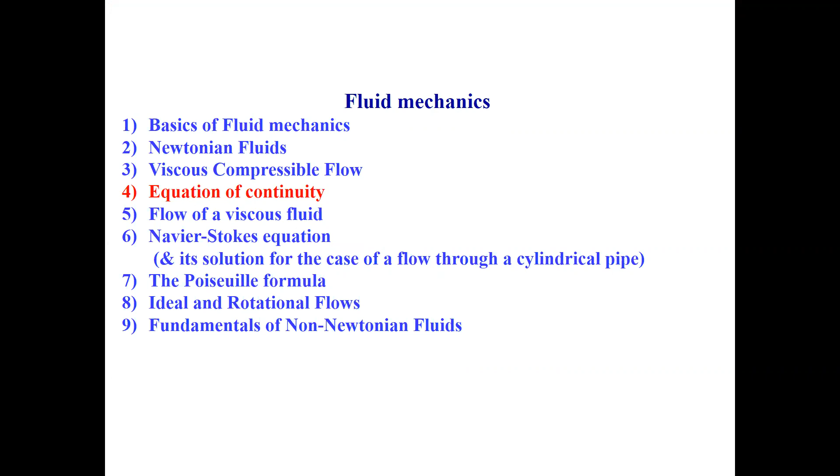Let us see the next one. Let us see that the equation of continuity is the fourth topic in your curriculum. I'll try to convince you in some manner by getting good examples, particularly from atmospheric dynamics.

You might have heard these names. The names are different mainly because a cyclone is the system generated in the atmosphere due to the rotation of the air mass. The same thing occurs as a whirlpool in huge lakes or rivers, not in the ocean.

Once they enter, it takes its own time to reach the bottom, and it will not stay there. Immediately, it comes back in an anti-clockwise motion. It will be thrown out either from left to right or right to left.

People entering the whirlpool should have the capability to hold their breath for a few minutes, sometimes a few tens of minutes. If you go with an external supply of oxygen, you can certainly enter the whirlpool and see the convections and flows that are possible.

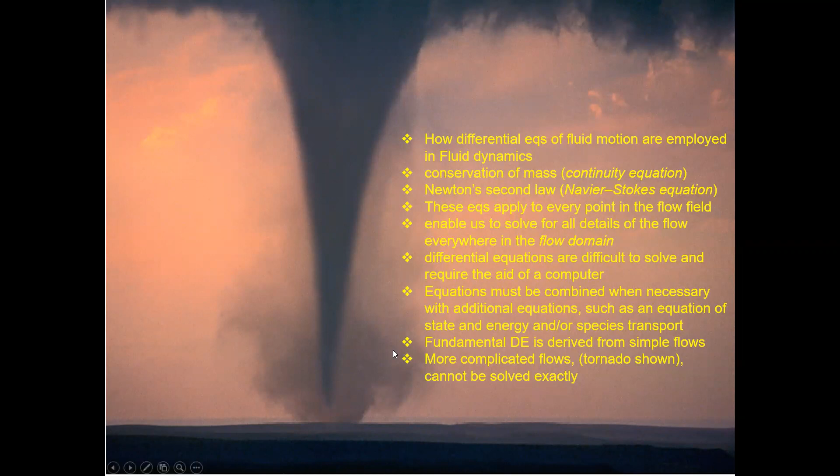More complicated flows, for example tornadoes as shown, cannot be solved exactly. For that we have to depend on the computer.

Okay, no issue. What you are seeing? Good, I hope you can see it—both top face and bottom face.

How many of you are from Bidadi? I hope some of you are from Ramnagara, and some from Ramohalli, near Bangalore University, hardly about 10 to 12 kilometers from this place. This is known as the dish antenna.

What you have as antennas in your house to get cable network or TV connectivity works differently actually. This is a huge dish of 32-meter diameter. IDSN, the Indian Deep Space Network, is a complex which comprises deep space antennas of about 32 meters.

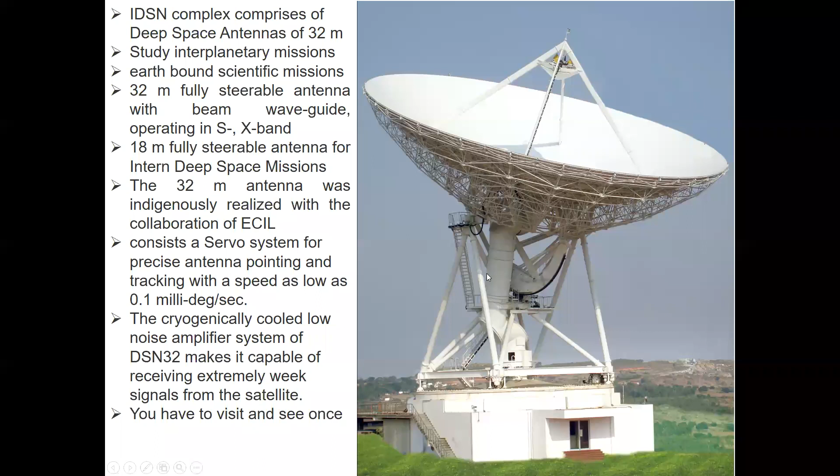You have to visit and see it once. From outside it's not a tough task—you can go see the big banyan tree near Ramohalli too, which is also available nearby. Of course, you can see it through the internet also, but if you have a chance to go there, it is better. Maybe if time permits, we will make a visit to this station once. If you are interested, let me know—you have to respond to me later.

This is another—see the same case now. How many of you are there?

How many of you are aware of swimming in water? Maybe some percentage. Maybe all of you know swimming better. Of course, I am not a good swimmer at all.

If you know swimming, you can swim along the flow of water, maybe in a river or canal, no issue, even wells, it's a tough task but still. If you want to go against the flow, you have to put more energy. Can you walk in a lake or river against the flow? It is difficult.

Can you keep any obstacle against the flow of water? It will collapse. If wind is coming from the left and hitting this entire 32-meter diameter, work out the circumference, pi times d, 2 pi r, so 32 times pi, pi means about 3, almost 100 times - 100 meters is the circumference.

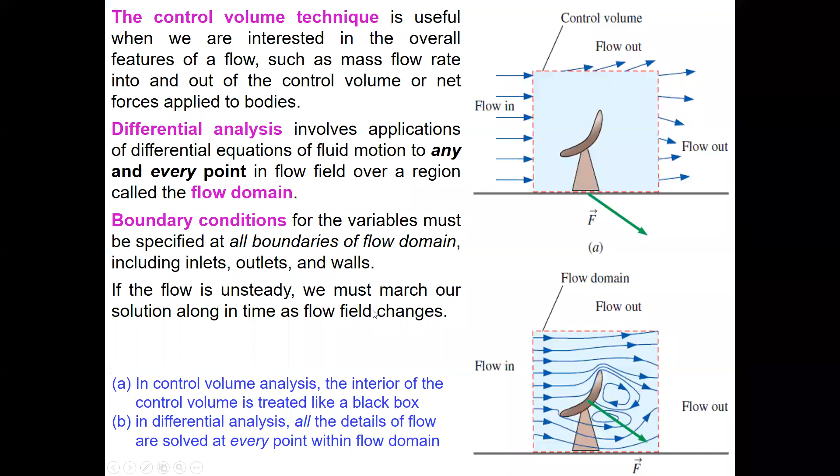In a flow, air density and temperature changes are insignificant - we are not considering them. There is a change in the density of the air, and to some extent it is allowed, a very infinitesimal change. If it changes drastically, we have to take it into account.

But it is sufficient to solve two differential equations of motion. One is the conservation of mass, and another is the linear momentum equation. The linear momentum equation can be solved by virtue of the application of Newton's second law.

For three-dimensional incompressible flow, like fluid water, there are four unknown quantities. What are those four unknown quantities? Particularly three velocity components: one along the direction u, another perpendicular to that direction v, and w is vertically upward. For example, along the rotation of the earth, east is u, north is the v component, and vertically height is the w component, plus also a pressure.

So four unknown quantities, plus four equations are required to solve these four unknowns. One from conservation of mass, which is a scalar equation, and three from Newton's second law, which is a vector equation. Newton's second law, rate of change of dp by dt, gives you the vector quantity.

These equations are coupled, meaning some of the variables appear in all four equations. The set of differential equations must therefore be solved simultaneously for all four unknowns. In addition, the boundary conditions for the variables must be specified at all boundaries of the flow domain, including the inlet, outlet, and walls, because we should have some velocity component along east, some along north, and some along the height w direction.

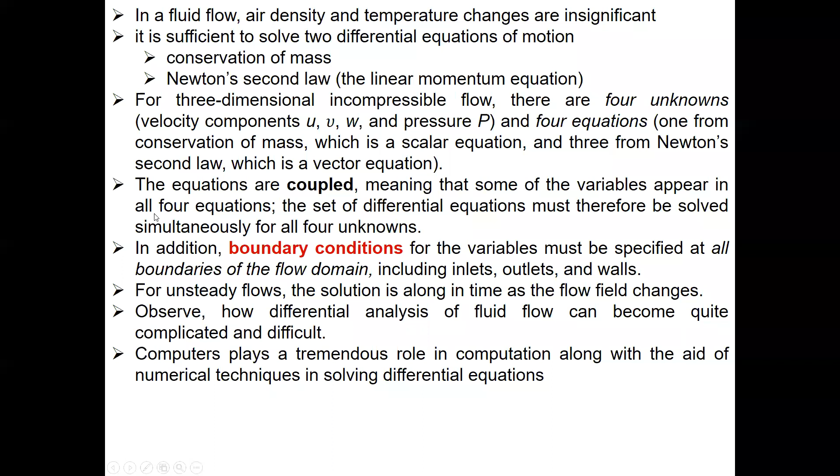Conservation of mass for a control volume is written such that the rate of change of density with time - particularly partial with respect to time - within the control volume dV, as in a control volume CV, plus the rate of change of V dot dA, where area also gets changed - how much it is there, one should know - that should be equal to 0.

It should be conserved. This equation is valid for both fixed and moving control volumes, provided the velocity vector here is the absolute velocity. We should know it moves with some speed as seen by a fixed observer.

When there are well-defined inlets and outlets, what will happen? The rate of change of density with time for the total volume should be equal to the mass flowing in minus the mass flowing out - the summation of mass coming in from all directions, and the summation of all masses that exit. For example, for an overhead tank, you may be supplying water by pumping from the reservoirs.

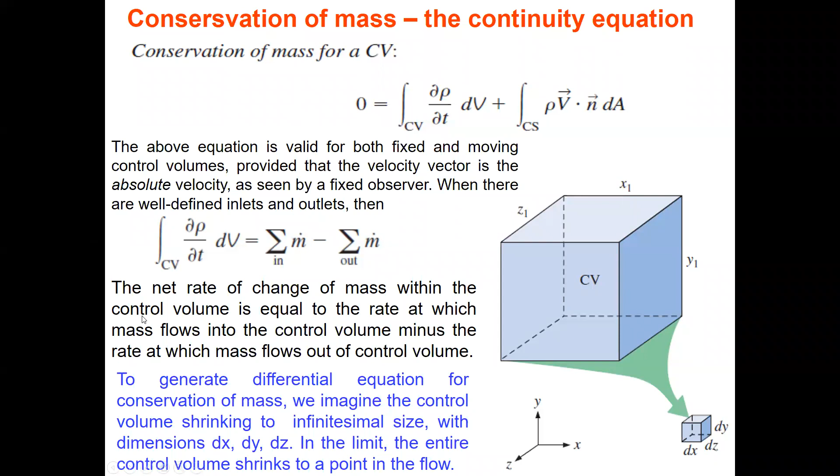What will happen, see that. One can derive this using the divergence theorem. If they ask for the continuity equation, write this equation and explain this diagram, that is good enough for 5 to 6 marks. How can one go about the derivation of this kind?

The quickest and most straightforward way to derive the differential form of conservation of mass is to apply the divergence theorem, also known as the Gauss theorem. The divergence theorem allows us to transform a volume integral of the divergence of a vector G into an area integral, or surface integral as they call it. The volume integral gets converted to the surface integral over the surface.

That defines the Gauss theorem or divergence theorem. Take this relationship mentioned in red and explain it. For a vector quantity like G, the divergence of G is defined as del dot G, and the divergence theorem can be mentioned in red color. The circle on the area integral is used to emphasize that the integral must be evaluated around the entire closed surface, the closed area that A surrounds, which encloses the volume V.

Also, you can call it G is equal to rho times V. Here you can write del rho by del T times dV plus the volume integral of del dot of rho V dV, or bring them together within the integral: del rho by del T plus del dot of rho V must be equal to 0.

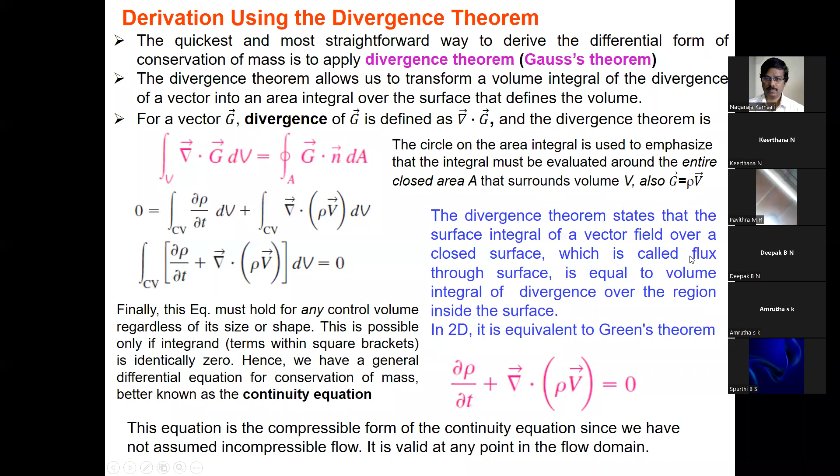Hence we have a general differential equation for the conservation of mass, better known as the continuity equation. The divergence theorem states that the surface integral of a vector field over a closed surface, called the flux through the surface, is equal to the volume integral of the divergence over the region inside the surface.

In 2 dimensions, it is equivalent to Green's theorem. Therefore, this equation is the compressible form of the continuity equation. Whatever is shown in red, since we have not assumed incompressible flow, it is valid at any point in the flow domain.

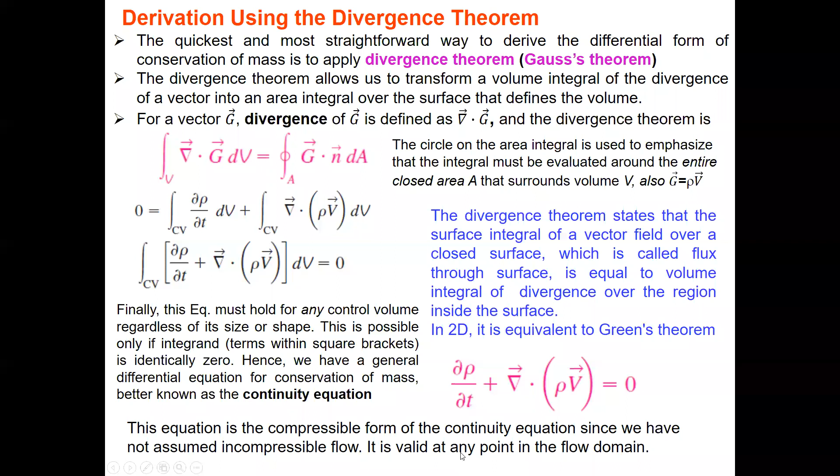You see the left face, right face, bottom face, top face, front face, rear face. There are 6 faces: one from the left, another from the right, from the top, from the bottom, from the front, and from the rear ends. There are 6 faces in total.

What I will do here, if you expect here... sorry.

This is the cube. How many faces are there? 1st face, 2nd face, 3rd face, 4th face, 5th face, 6th face. Yes, there are totally 6 faces. Just I thought of showing you, and it is how it is appearing for you actually.

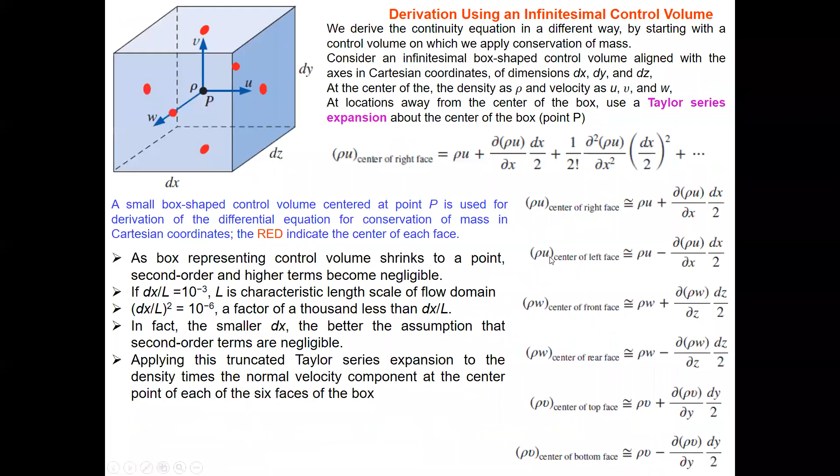Let us take from this face, then these are the same thing actually. Go with this equation and come for this, then finally arrive at this equation. This is the derivation or expression for the continuity equation.

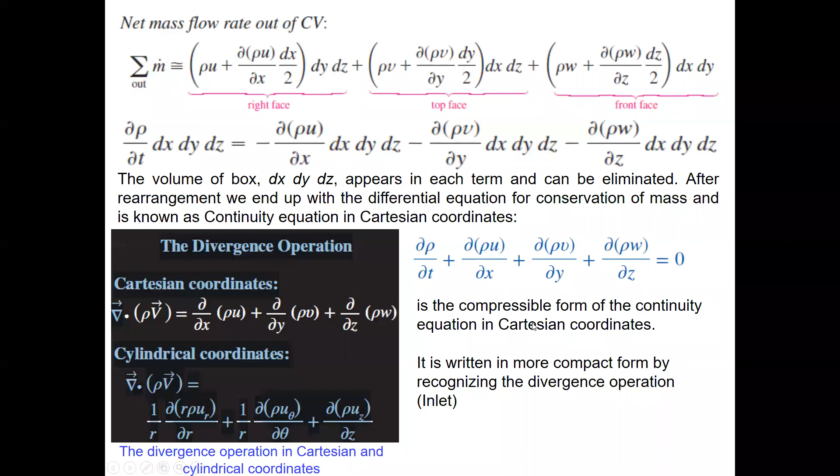For further understanding, you can use the examples I will share with you right now. Maybe you read the problems. Just I quoted with you some of the textbook. Actually, I will share with you later also.

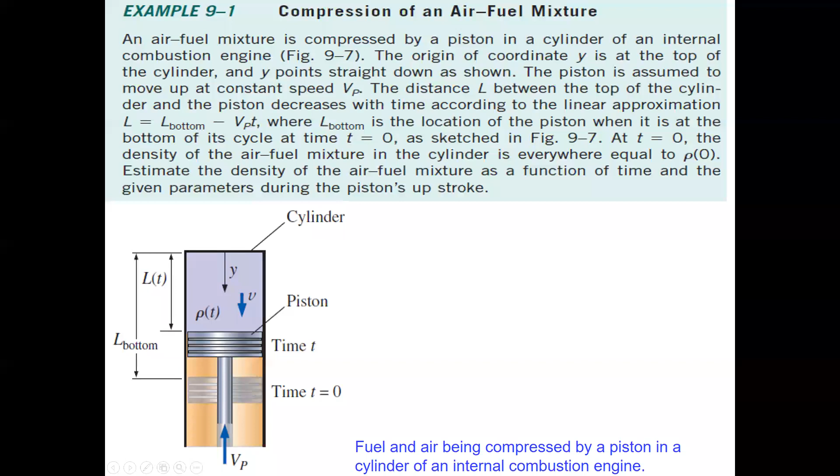An air fuel mixture is compressed by a piston in a cylinder of an internal combustion engine. Then one has to estimate how much the fuel and air is being compressed by a piston in a cylinder of an internal combustion engine, and how that changes, one has to work it out. This is the cylinder, this is the piston which is working, from time t equal to 0 to time t, how much the pressure it can build up.

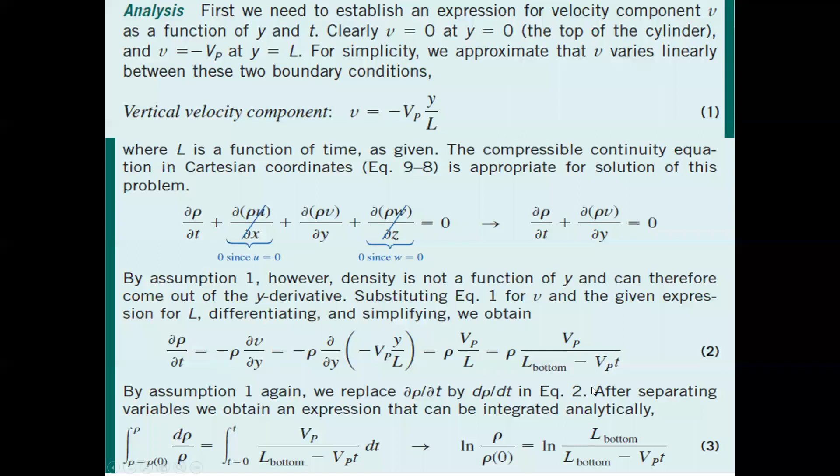Analysis has to go with the velocity component, the same equations. I will leave it to you to solve for this, you can obtain the expression like that. Meaning how that can build up non-dimensional density as a function of non-dimensional time, for example, has to go with an equation of this kind. Rho by rho naught, you can build it up like that actually.

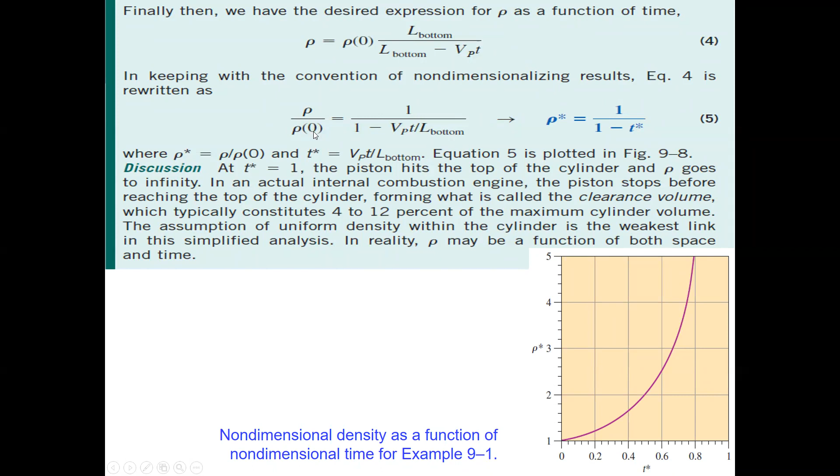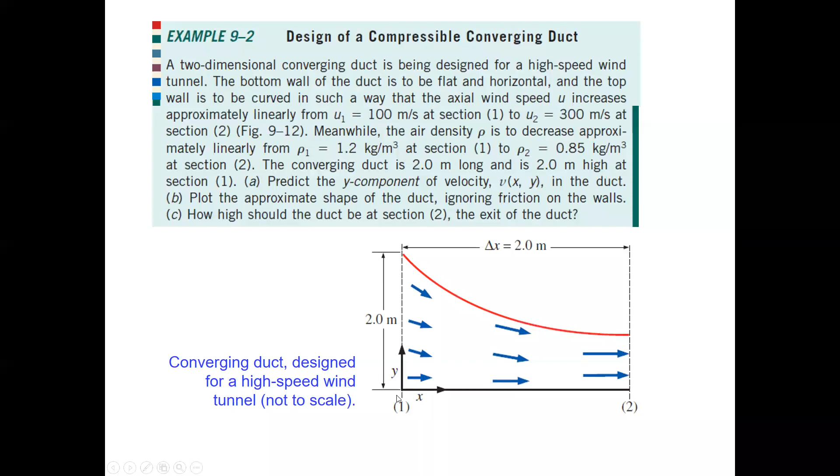Here one can work out what must be the possible time for that. You can have the design of a compressible converging duct. Fluid moves like this - what should be the equation? See that the same conservation of mass applies.

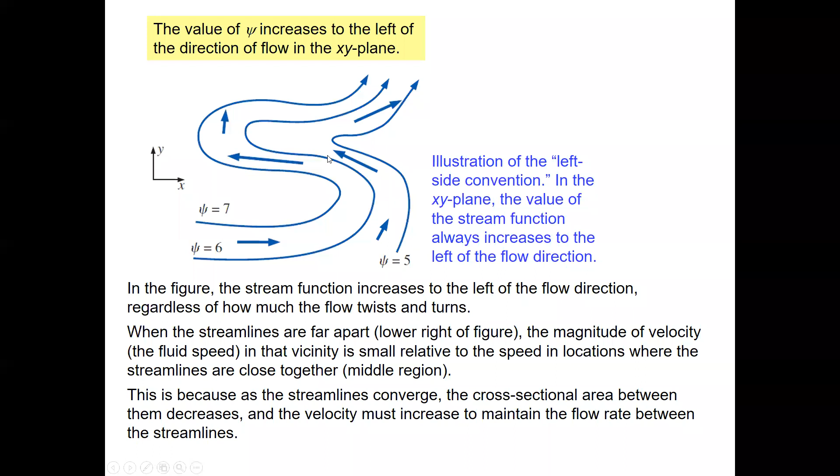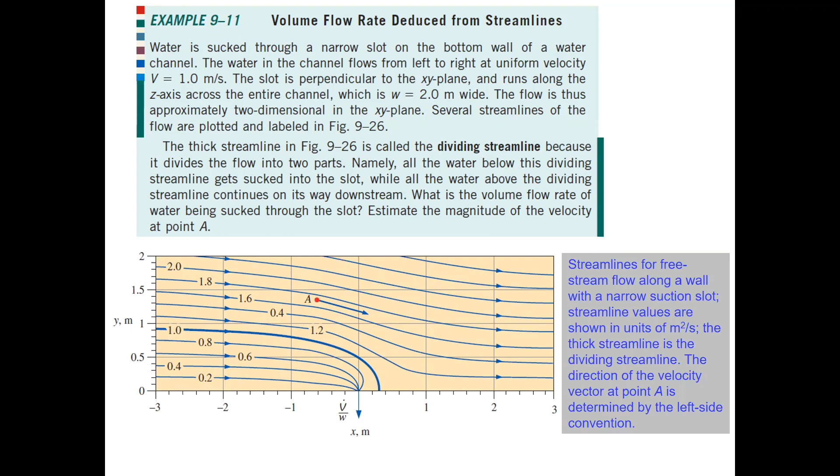Volume flow rate can be deduced from the streamlines. See that these are equations. These are the examples. It looks complicated for you, but just see that you at least work out the rest of that part.

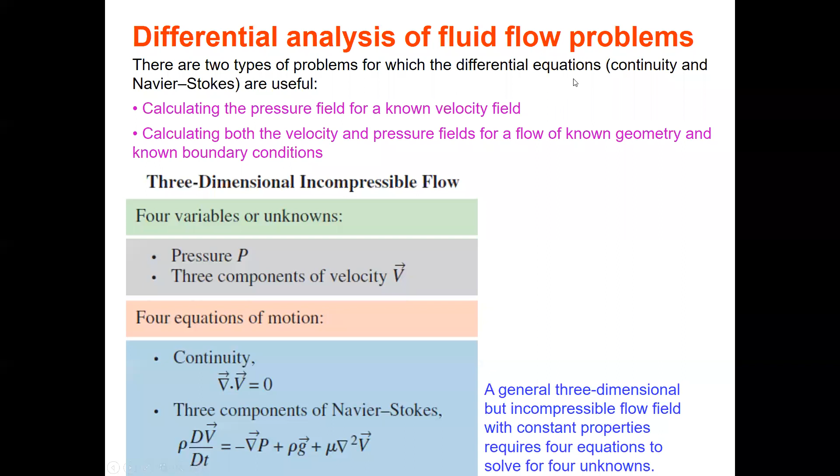Differential analysis of flow problems can occur. There are two types of problems, continuity and Navier-Stokes equations. This I will take up in next class. I don't know how much time I'm having.

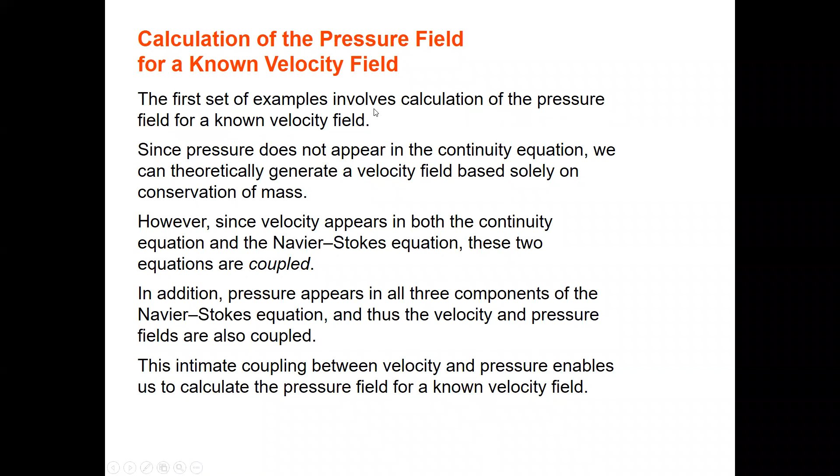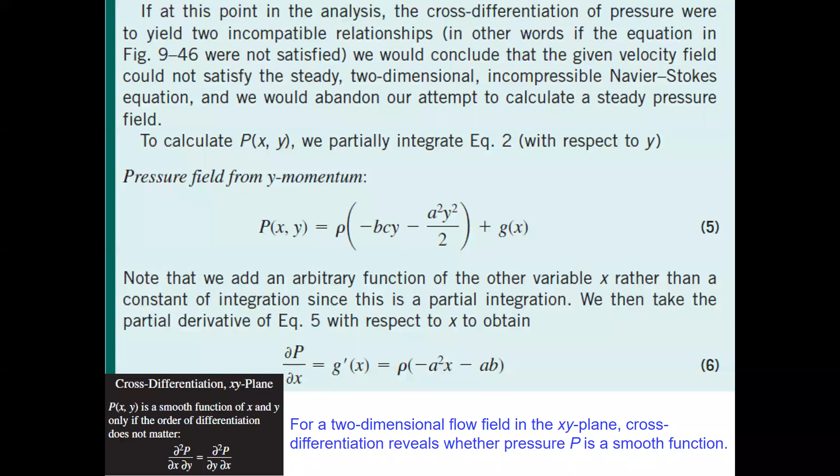See that? See this? Don't get scared about the additional information I am providing.